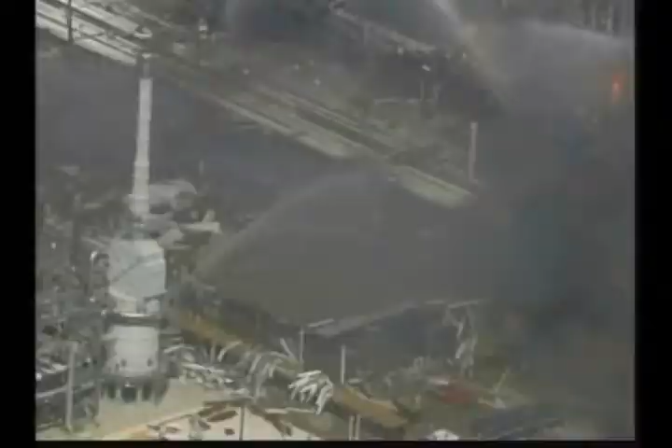This investigation was the largest and most comprehensive investigation in the history of the Chemical Safety Board. CSB Supervisory Investigator Don Holmstrom led a two-year investigation to determine the root causes of the accident.

We interviewed over 370 witnesses. We looked at thousands of documents, literally millions of pages of documents, and we examined the plant, inspected over 40 pieces of instrumentation and equipment.

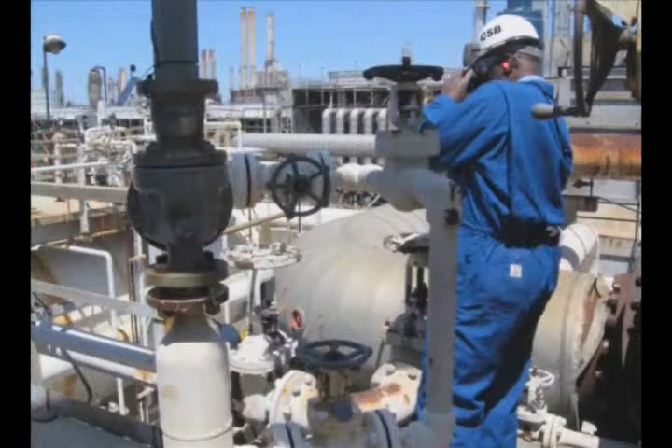The investigation team examined a wide range of safety systems, practices, and standards, and looked at human factors such as fatigue and communication between operators.

The board's report was released at a public meeting in Texas City on March 20, 2007. Then-CSB Chairman Carolyn Merritt presided.

Many of you here tonight had family members or co-workers who were victims of this explosion. To all of you, I express my deepest condolences and sincere wishes that society never allows another accident like this to occur. The tragedy at BP was the worst industrial accident in the United States in nearly 15 years.

The CSB concluded that it was the result of organizational and safety deficiencies at all levels of the company. We found that BP management had, for many years, overlooked warning signs of a possible catastrophic accident.

There's an old saying that if you think safety is expensive, try an accident. Accidents cost a lot of money, and not only in damage to plant and in claims for injury, but also in the loss of the company's reputation.

The reason why the Texas City accident has such an impact is because when people look at it, they can see that they are all in the same boat, that the problems which led to that accident are likely to be present at other sites around the world.

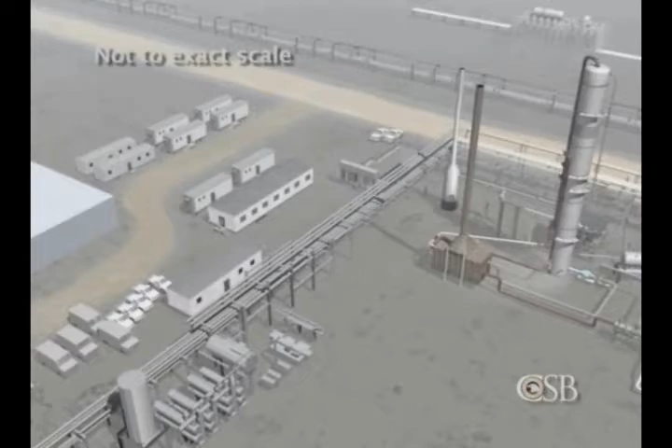Several units at the Texas City Refinery had been shut down for lengthy maintenance projects, which required nearly 1,000 contractors to be on site along with BP employees.

BP had positioned a number of portable trailers close to process units for the use of contractors and other maintenance workers. Over a period of months, BP had located 10 trailers for workers servicing the ultracracker unit, including a double-wide wood-frame trailer that contained 11 offices and was regularly used for meetings.

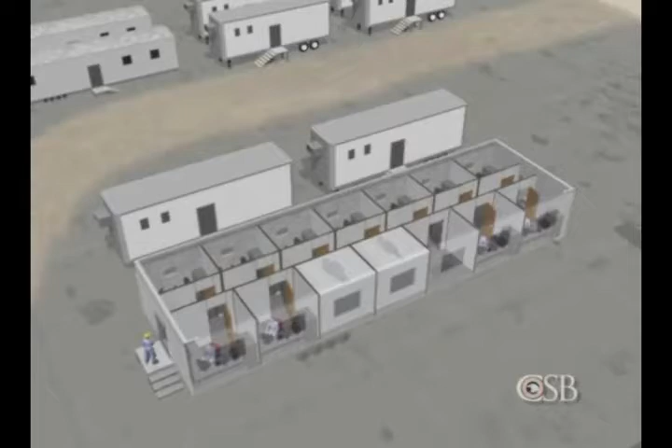Though these trailers were located near the isomerization unit, the occupants were not warned the ISOM unit was about to start up, a potentially hazardous operation.

At 2:15 a.m. on March 23rd, overnight operators began introducing flammable liquid hydrocarbons, known as raffinate, into a 170-foot tall raffinate splitter tower used to distill and separate gasoline components.

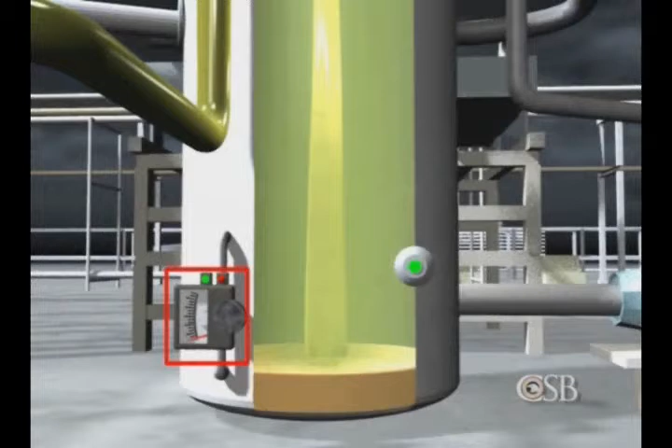Near the base of the tower, there was a single instrument that measured how much liquid was inside. It transmitted this information to a central control room located away from the ISOM unit. But this level indicator was not designed to measure liquid above the 9-foot mark.

During normal operation, the tower was only supposed to contain about 6.5 feet of liquid. But during startups, operators routinely deviated from written procedures and filled the tower above the 9-foot mark, concerned that if the liquid level fluctuated too low, it would cause costly damage to the furnace.

At 3:09 a.m., as the liquid neared the 8-foot mark, a high-level alarm activated and sounded in the control room. But a second high-level alarm, slightly further up the tower, failed to go off.

By 3:30 a.m., the level indicator showed that liquid had filled the bottom 9 feet of the tower, and the feed was stopped. The CSB later estimated that the liquid was in fact at a height of 13 feet, but operators could not know the actual level because the indicator only measured up to 9 feet.

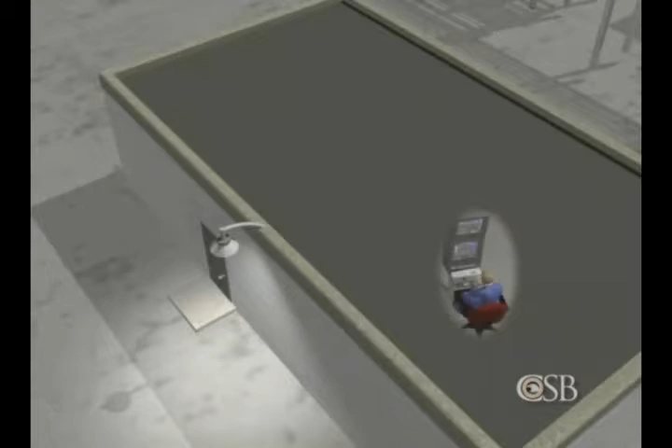The lead operator had been overseeing the startup from a satellite control room within the ISOM unit. At 5 a.m., he briefly updated the night board operator in the central control room about the startup activities. The lead operator then left the refinery early, an hour before the end of the shift.

A new board operator arrived in the control room around 6 a.m. to start his 30th day in a row working a 12-hour shift. He spoke briefly with the departing night shift operator and then read the logbook to prepare for the startup.

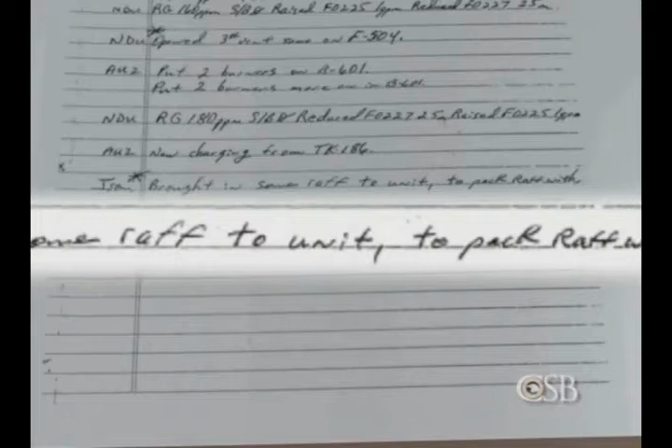But the logbook did not clearly indicate how much liquid was already in the tower and equipment, and it left no instructions on routing of the liquid feed and products when the startup resumed. Instead, the control board operator only found a one-line logbook entry that said, 'ISOM brought in some raff to unit to pack raff with.' At 7:15 a.m., the day shift supervisor arrived.

Because he was more than an hour late, he received no formal briefing from personnel on the night shift about conditions in the ISOM unit. At 9:51 a.m., operators resumed the startup.

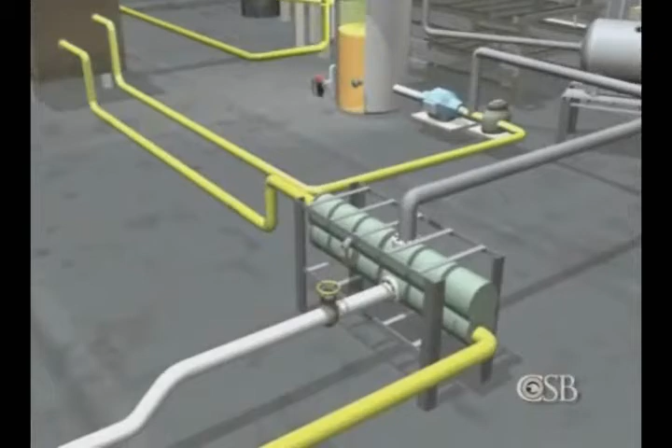They began recirculating the liquid feed and adding more liquid to the already overfilled tower. As new feed was added, startup procedures called for regulating the liquid level in the tower using the automatic level control valve. But the board operator and others had received conflicting instructions on routing the product. As a result, this critical valve was left closed for several hours, blocking the flow of liquid from the tower.

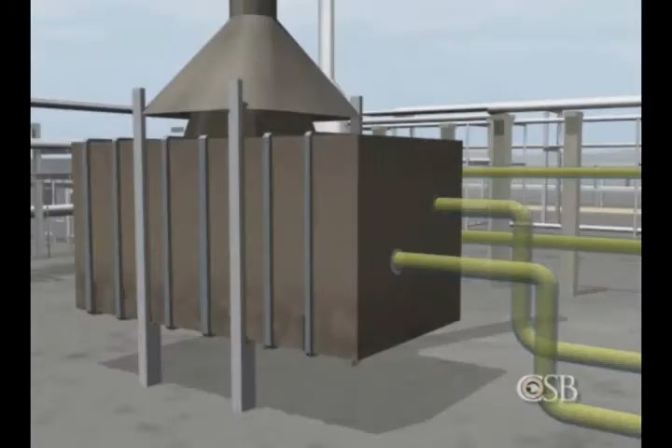A few minutes later, operators lit burners on the furnace to begin heating up the feed, part of the normal startup process. While the startup was underway, the day supervisor left the refinery on short notice just before 11 a.m. to attend to a family medical emergency.

Contrary to BP's own procedures, no experienced supervisor was assigned to replace him. This left a single control board operator, now without a qualified supervisor, to run three refinery units, including the ISOM unit, which needed close attention. The refinery had eliminated a second board operator position following corporate budget cuts in 1999 after BP acquired Amoco.

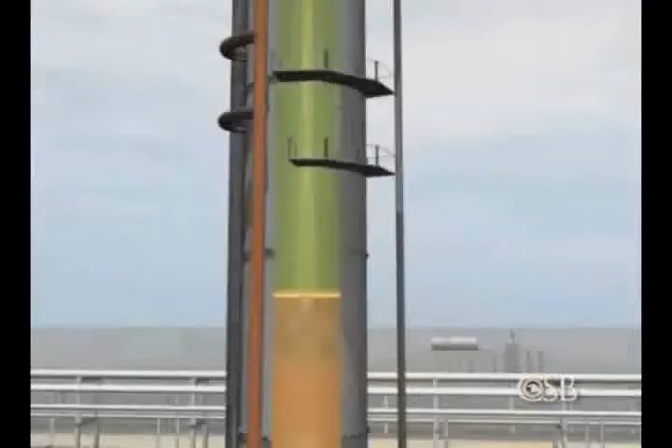As the startup continued, the tower steadily filled with liquid, reaching a height of 98 feet shortly before noon, more than 15 times the normal level.

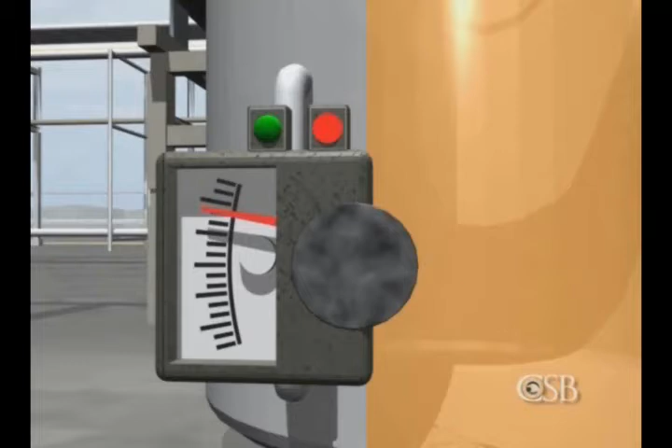But the improperly calibrated level indicator told operators in the control room that the liquid was at 8.4 feet and gradually falling. Furthermore, the control panel was not configured to clearly warn operators of the growing danger. It did not display flows into and out of the tower on the same screen, nor did it calculate the total liquid in the tower.

Meanwhile, the maintenance contractors, who were not involved in the operation of the ISOM unit, left their work trailers to attend a company lunch, celebrating a month without a lost time injury.

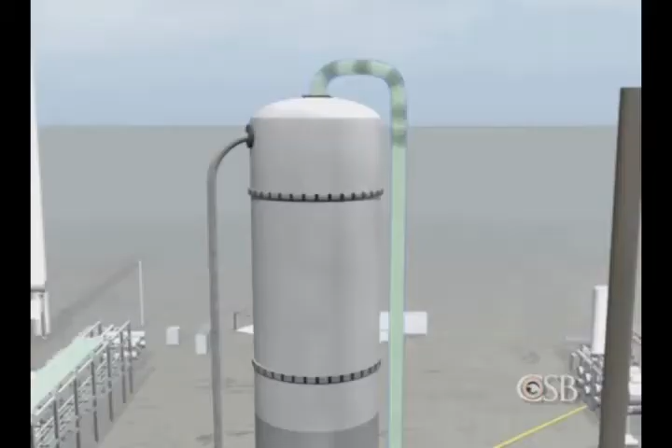At 12:41 p.m., an alarm activated as the rising liquid compressed the gases remaining in the top of the tower. Unable to understand the source of the high pressure, operators opened a manual chain valve to vent gases to the unit's emergency relief system, a 1950s-era blowdown drum that vented vapor directly into the atmosphere.

Operators also turned off two burners in the furnace to lower the temperature inside the tower, believing this would reduce the pressure. Nobody knew the tower was dangerously full.

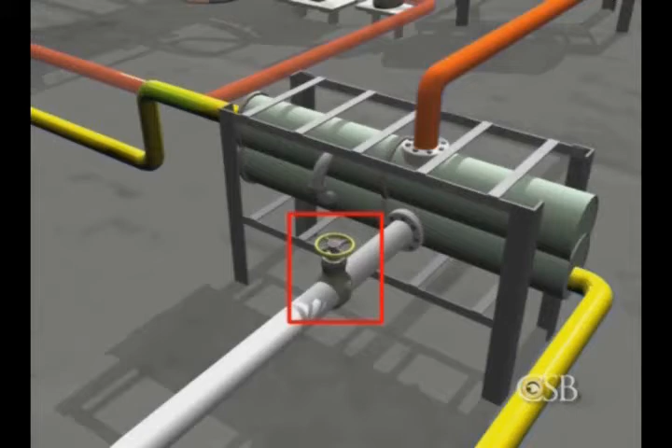The operators did become concerned about the lack of flow out of the tower and began opening the valve to send liquid from the bottom of the tower to storage tanks.

But this liquid was very hot. As it flowed through the heat exchanger, it suddenly raised the temperature of the liquid entering high up the tower by 141 degrees Fahrenheit. It was now about 1 p.m.

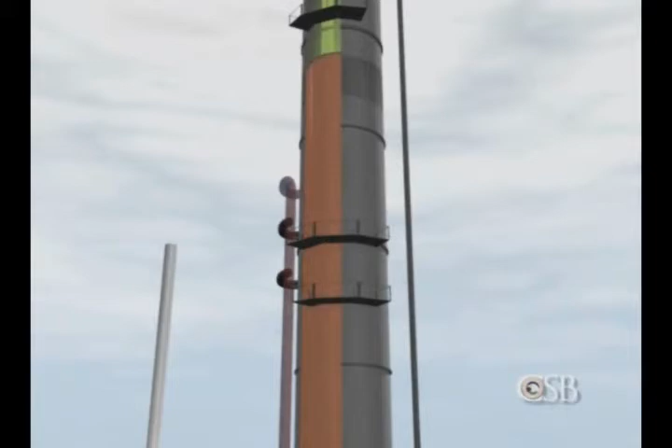Contract workers, unaware of the startup and the looming danger, returned from lunch and began a meeting in the double-wide trailer in the corner room closest to the blowdown drum.

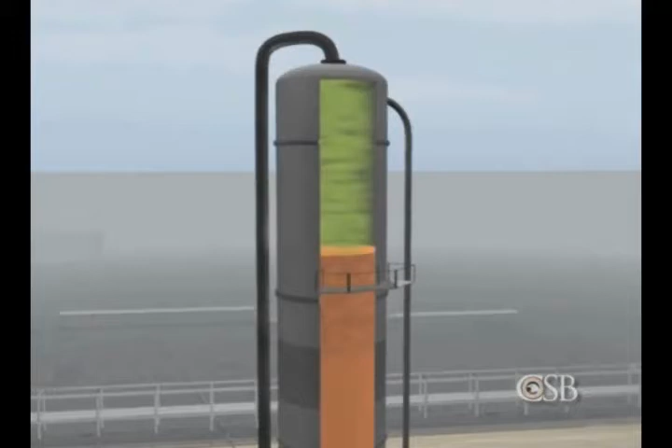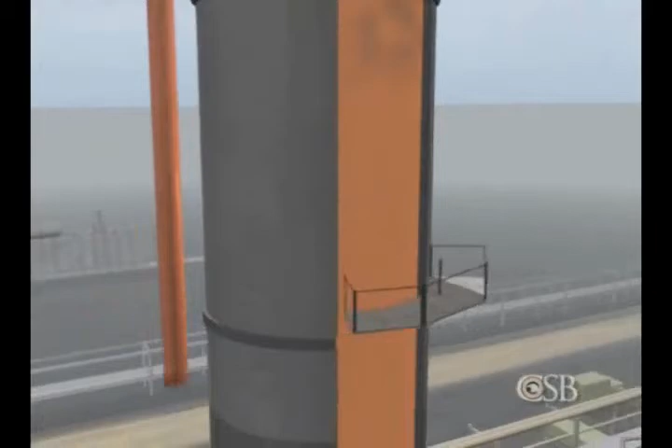Over the next few minutes, the hot feed entering the tower caused the liquid inside to start to boil and swell. Liquid filled the tower completely and began spilling into the overhead vapor line, exerting great pressure on the emergency relief valves 150 feet below.

At 1:14 p.m., the three emergency valves opened, sending nearly 52,000 gallons of flammable liquid to the blowdown drum at the other end of the ISOM unit.

Liquid rose inside the blowdown drum and overflowed into a process sewer, setting off alarms in the control room. But the high-level alarm on the blowdown drum failed to go off. None of the operators knew of the catastrophe unfolding in the ISOM unit.

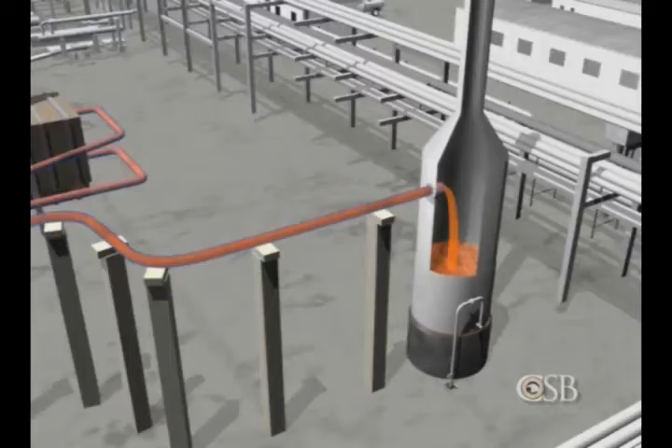As flammable hydrocarbons overfilled the blowdown drum, operators nearby saw a geyser of liquid and vapor erupt from the top of the stack. The equivalent of nearly a tanker truck full of hot gasoline fell to the ground and began forming a huge flammable vapor cloud.

This scene, based on CSB computer modeling, shows how the vapor cloud expanded in just 90 seconds, engulfing the unit and the nearby trailers full of workers.

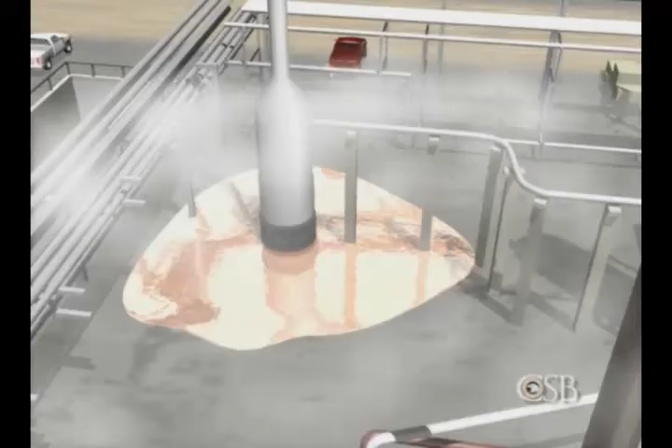About 25 feet from the base of the blowdown drum, two workers were parked in a pickup truck with the engine idling. As flammable vapor entered the air intake, the diesel engine began to race. The two workers fled, unable to shut off the engine.

Moments later, witnesses saw the truck backfire and ignite the vapor cloud. Powerful explosions swept through the area.

Computer modeling shows how the blast pressure wave accelerated through the ISOM unit, causing heavy destruction and igniting fires throughout the area. The workers inside the trailers were right in the path of the explosions. The fires continued to burn for hours.

12 of the 20 occupants of the double-wide trailer were killed, along with 3 workers in a trailer nearby. Dozens of others suffered serious burns, fractures, and other traumatic injuries.

The wood and metal frame trailers were blown apart by the blasts. Firefighters struggled to rescue the injured and recover the victims. 50 large chemical storage tanks were damaged, and the ISOM unit remained shut down for more than 2 years.

The CSB said managers, executives, and boards of directors should do the following: monitor process safety performance using appropriate indicators, invest sufficient resources to correct problems, maintain an open and trusting safety culture where near misses are reported and investigated.